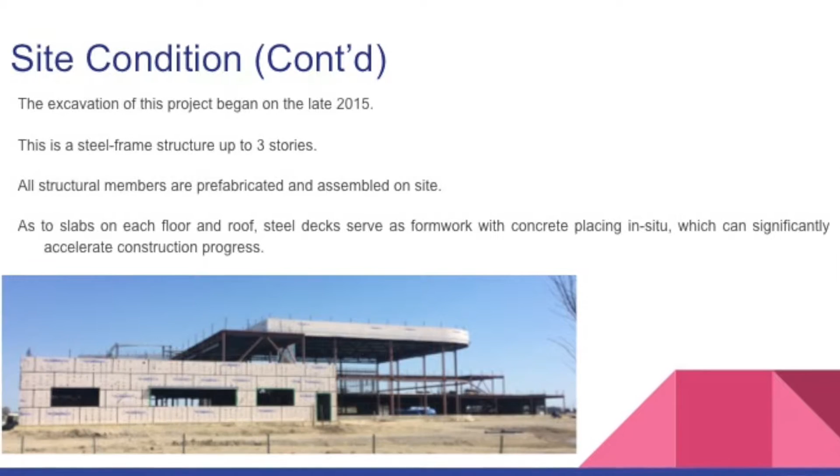The specific construction activity we are researching for predictive analysis is finishing work for the concrete dwarf wall around the outside of the building. There are 5 members in this crew to fulfill this activity. Each laborer was assigned specific work such as cutting concrete, rub finishing, applying mortar, spraying grout, and drilling.

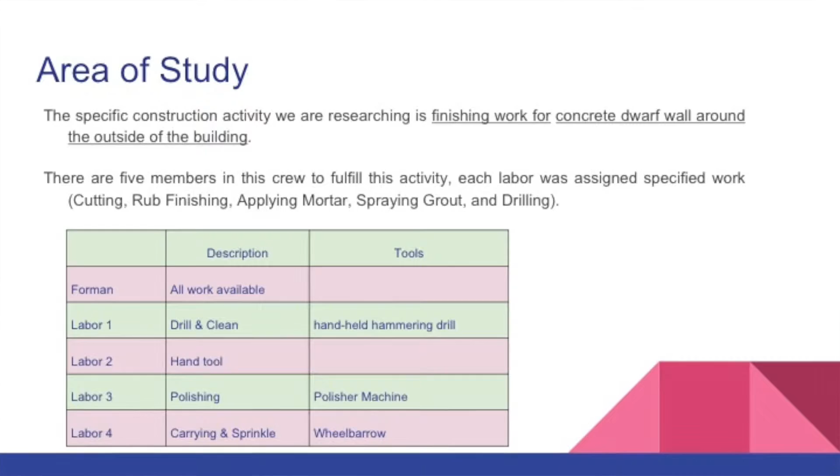A total number of 5 workers, 4 equipments and tools were observed. 1 foreman and 4 laborers were spraying grout, cutting concrete, rubbing finish, and patching void on the fresh concrete wall. Instead of giving instruction, the foreman assisted laborers' work during the whole process.

We created the crew balance chart based on the recorded video. In the crew balance, we used 5 seconds as an interval.

We recorded many videos from different perspectives and different time periods to make more accurate calculations. Rubbing finish work was taking the whole cycle time and was still in progress after 1 cycle. Carrying the bucket is fixed to be about 5 seconds. Also, mixing concrete by workers took 20 seconds.

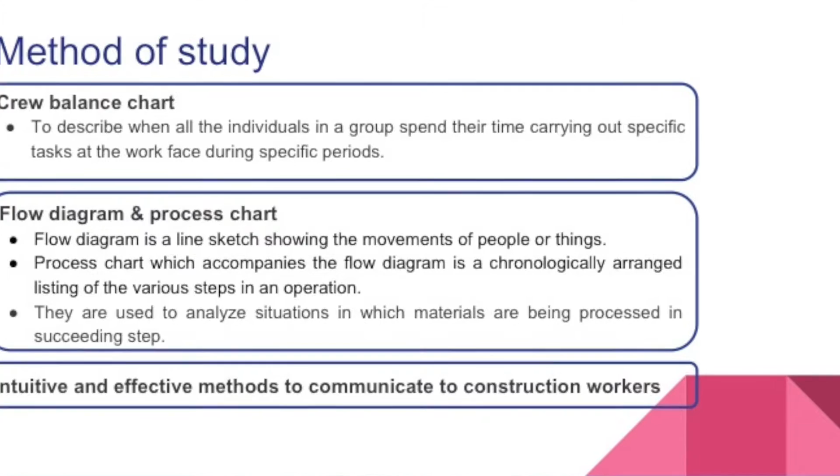Flow diagrams and process charts are often used together to analyze situations in which an operation is processed in succeeding steps. We created a flow diagram and process chart for the operation.

As we can see in the flow diagram, the operation is proceeding from west to east, with cutting concrete starting first and fine finishing at last.

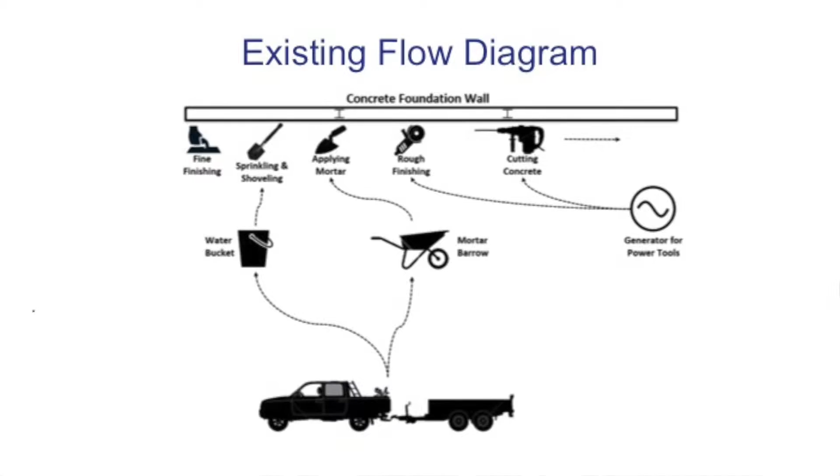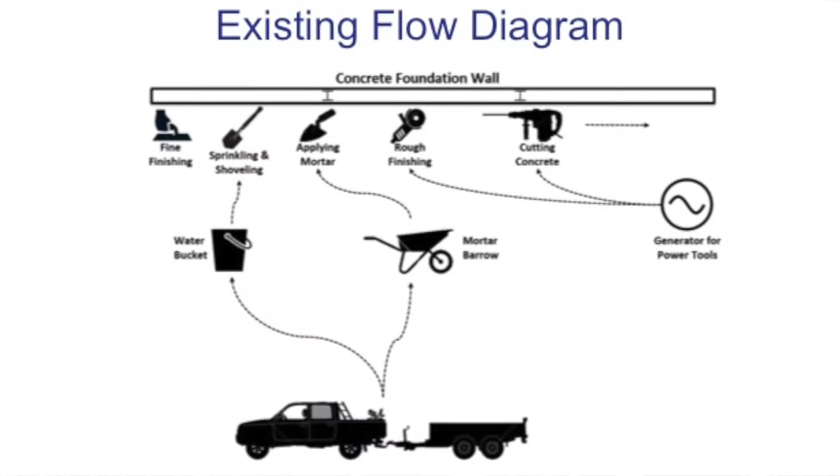The mortar and water are stored in the adjacent trailer truck, and then they are delivered to laborers by barrow and water bucket. Also, the generator is on the east side of the job site to provide power for the grinder and the driller. The cycle time is 4 minutes.

So there are 15 typical cycles performed in 1 hour. The cost for the current cycle is calculated based on the newest RS means data.

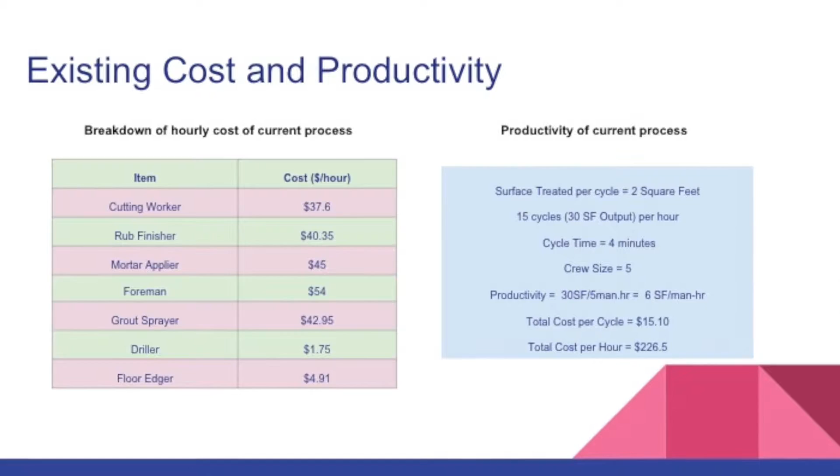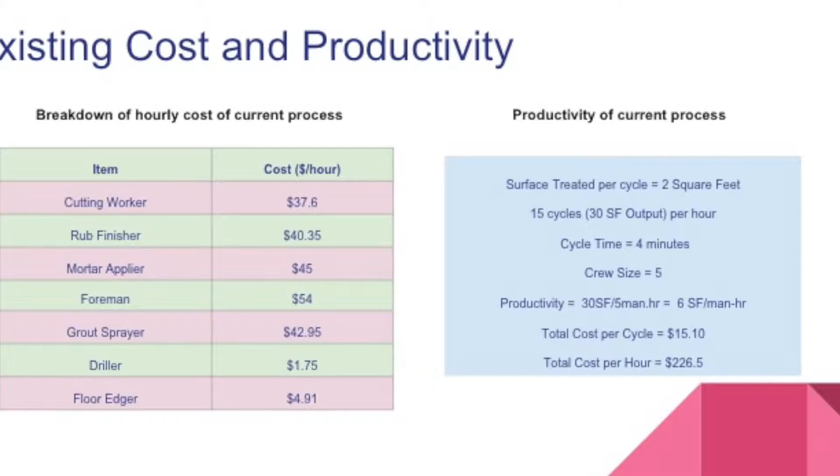And the cost for the foreman is 20% higher, which is $54 per hour. Therefore, the total resulting hourly cost for the existing operation is $226.5, and the hourly output of the operation is 30 square feet per hour. So the productivity of the existing operation is 6 square feet per man-hour.

There were major problems which reduced the productivity of the process. Firstly, the number of workers were more than required, which resulted in long idle times. More labor were dedicated to non-critical activities than critical activities, leading to availability of workspace problems.

Drilling activity was slower with respect to shoveling activity, which required removing of scraped concrete. Therefore, 2 workers ended up working in a congested space at one point of time.

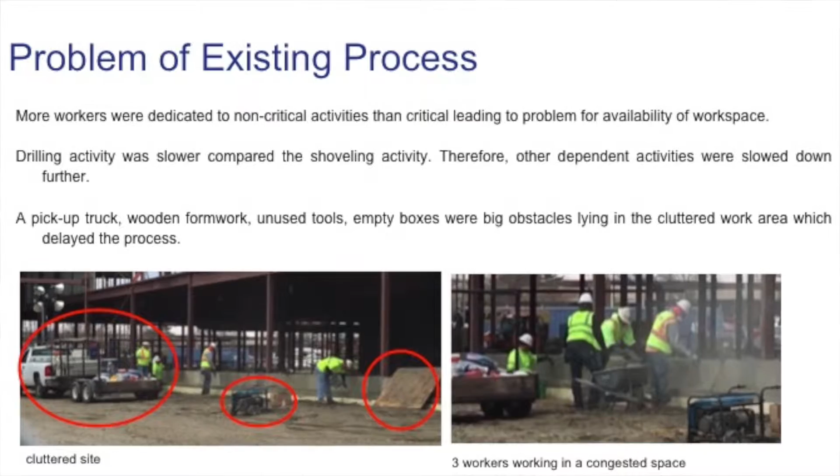There was no site preparation done before the commencement of the process. A pickup truck was parked a meter distance from the area where workers were working. Also, the wooden planks of the formwork, unused tools, empty boxes were lying here and there on the site.

The labor cutting the extra concrete had to stop in between and ask for help from other laborers to remove the big obstacles. The cutting of concrete and then rub polishing by power-driven machine resulted in a lot of air particles in the work zone.

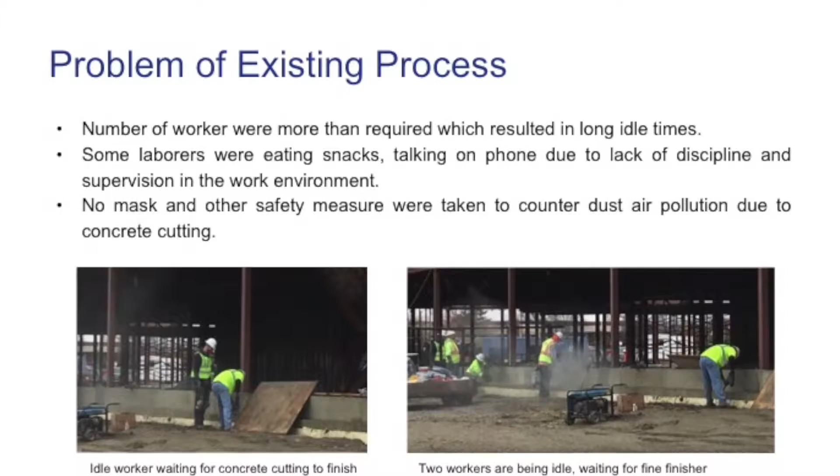However, no mask or other safety measures were taken to counter these issues. In fact, it resulted in lower productivity because other laborers were maintaining the distance to avoid air particles from entering.

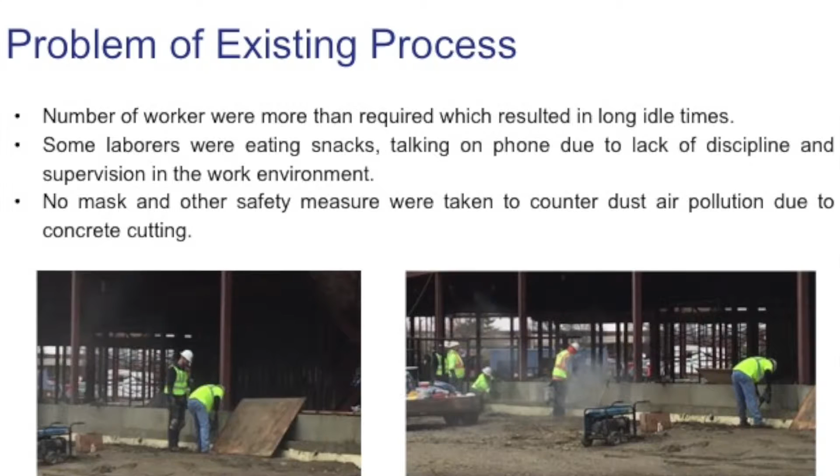It was also observed that some laborers were eating snacks, talking on phone due to the lack of discipline and supervision in the construction site.

Today we are going to talk about the implementation of the proposed plans and the cost associated to it. In this section we have analyzed productivity aiming to solve critical path issues and location-based management issues while attempting to increase productivity by reducing the duration and the cost of the work.

The cutting of extra concrete and the rough finish was a critical path which was necessary to be done before other tasks. Therefore, in the plan, we allocated 2 laborers to work on cutting first and then help other members of the crew. We plan to provide extra power-driven concrete cutting equipment and rough finishing equipment so that 2 laborers can work on it simultaneously.

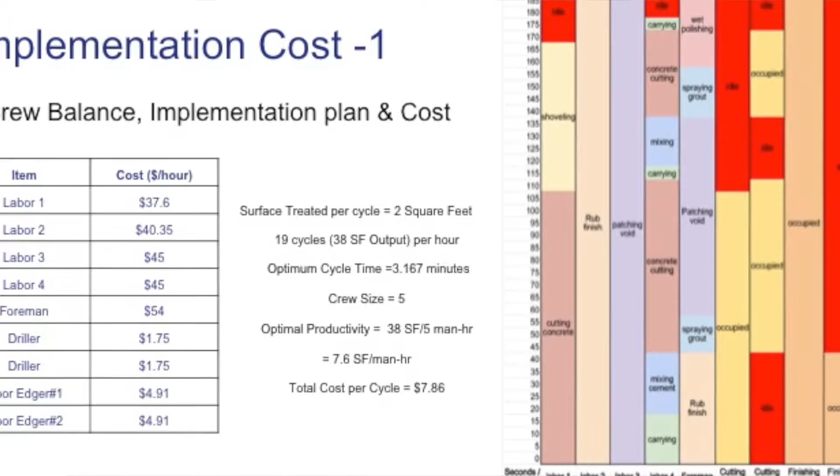This has significantly reduced the time from 4 minutes to 3.167 minutes, which is a 20% reduction in time to complete the work. Selection of correct work allocation according to their labor rate has further contributed to substantial cost cutting, from $15.10 to $7.86 per cycle cost. This provides a 48% reduction in the cost of the process.

To improve the productivity of our workers, one of the ideas that we came up with was to reduce the number of workers that we were using for the task. So to do this, we analyzed the activities that each worker was doing, and we tried to find out the 2 workers that were found to be idle for most of the time.

After doing the analysis, we found that the foreman and worker 4 were idle for most of the time. So we decided to get rid of worker 4 and make the foreman do the activities that were supposed to be done by worker 4. By doing so, our productivity improved from 6 square feet per man hour to 7.5 square feet per man hour.

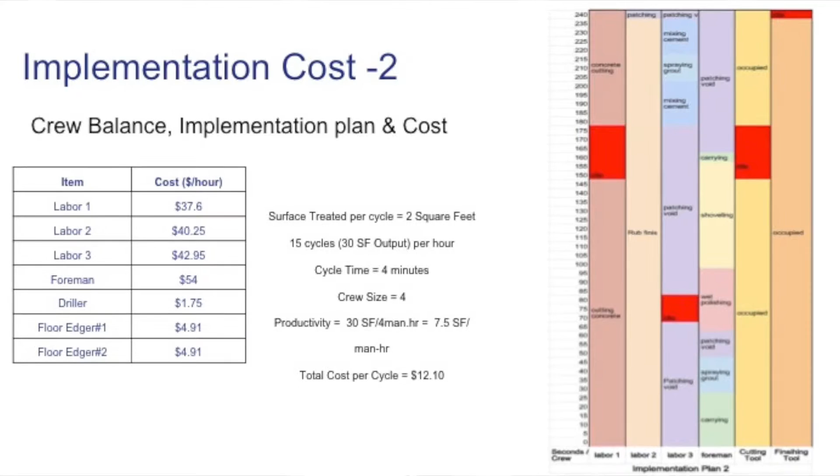In addition, we also saved some cost because our cost per cycle reduced from $15 a cycle to just $12 a cycle, which is a big difference. Our cost per hour also reduced from about $220 an hour to $180 per hour. So in this way, we managed to improve the productivity of our workers and saved on the cost as well.

In this proposed improvement, we aim at parallelizing some of the operations, as we observe the whole process is in a linear fashion. Another observation we made is that the concrete cutting has much higher productivity than its following operation, concrete rough finishing with grinder.

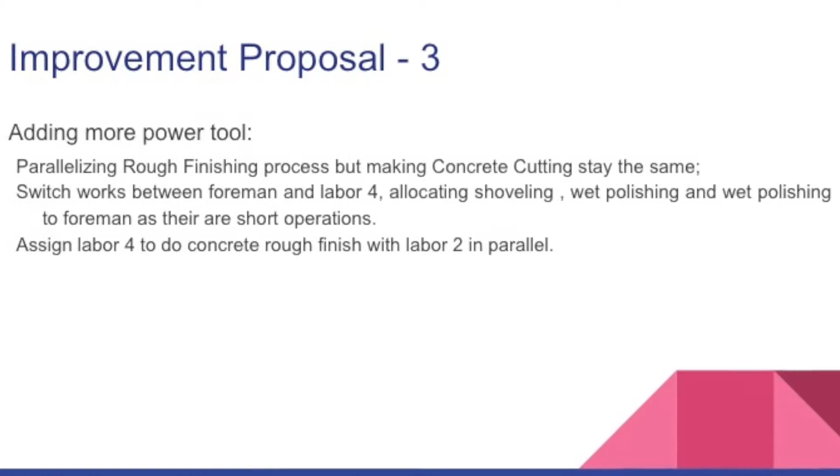This can also be told from the recorded videos. Very often, concrete fine finishers wait for the rough finishers, and there are more fine finishers than actually needed. In this case, we add one more concrete grinder and assign one of the fine finishers to rough concrete finishing.

This will change the cycle time from 4 minutes to 3 minutes and a half, making the concrete cutting become the critical operation of the cycle.

Also, even though we assign labor 4 to concrete rough finishing, we also assign part of the fine finishing job. We're still choosing the higher rate, which is $45 an hour for him. Equipment hourly cost is calculated as daily cost divided by 8 hours.

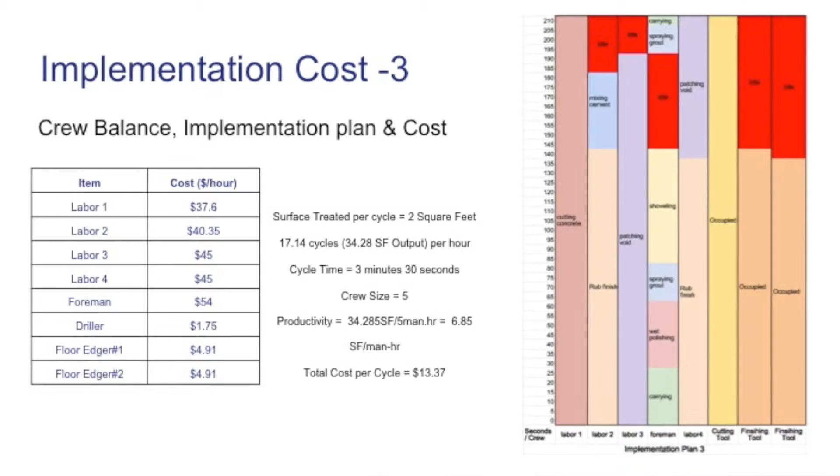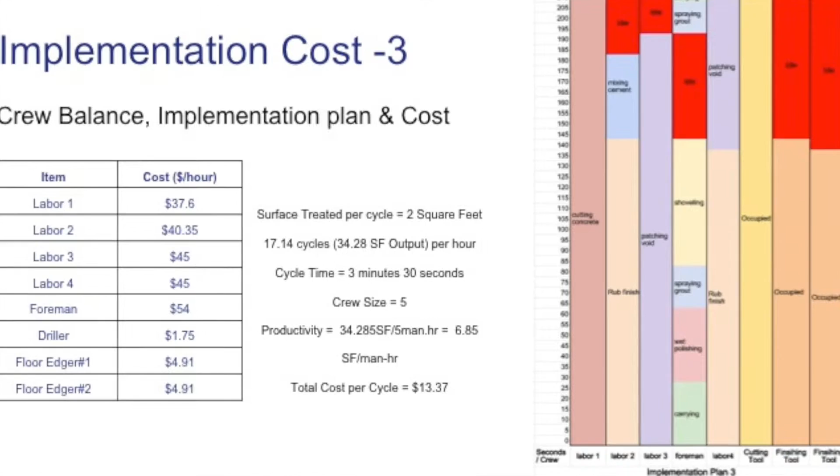In this proposed plan, the productivity increased from 6 square feet per man-hour to 6.85 square feet per man-hour, and the total cost of one cycle reduced from $15.10 per cycle to

$13.37 per cycle. Odebrecht pays special attention towards health and safety of its employees. For this reason, I was asked to meet the site superintendent before visiting the job site, and I took special permission for doing the video recording activity on the site.

I also asked him about the potential risks and hazards and their respective solutions. And in a small debriefing before entering the job site, I told all my team members about the safety steps.

I also made sure that all the team members who were visiting the job site were in proper attire, like wearing hard hats, steel toe boots, and gloves. We also made sure that all the team members were checked in and checked out at the security entrance of the job site.

I was also responsible for making sure that all the team members who were doing the recording activity were at least 50 feet away from the construction activity in progress.

When looking into the current cycle for the analyzed activity, some aspects require immediate action and improvement, as the cost per hour to perform this activity may not be feasible. 3 possible solutions were proposed for the current task.

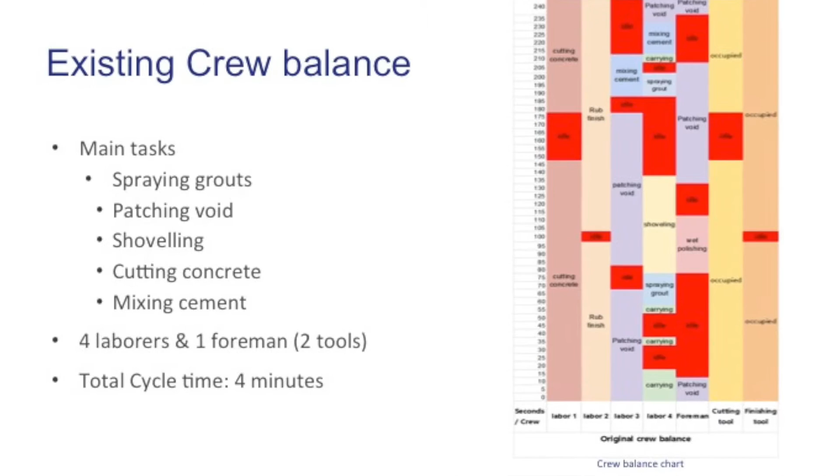The third and final proposal is about parallelizing some of the operations, as we observe the whole process is in a linear fashion, including facts of some tasks having higher productivity than others, more workers than needed, or less than required. This activity assessment shows that no matter how simple an activity may be, there will always be methods to significantly improve the productivity rate of any kind of construction activity.

Which in the long term translates into important money savings for any construction. But a fact that needs to be understood is that in real life situations, you may have the best tools and the best process, but you have to always make sure that the crew performing the task is a disciplined one with the proper supervision if required.